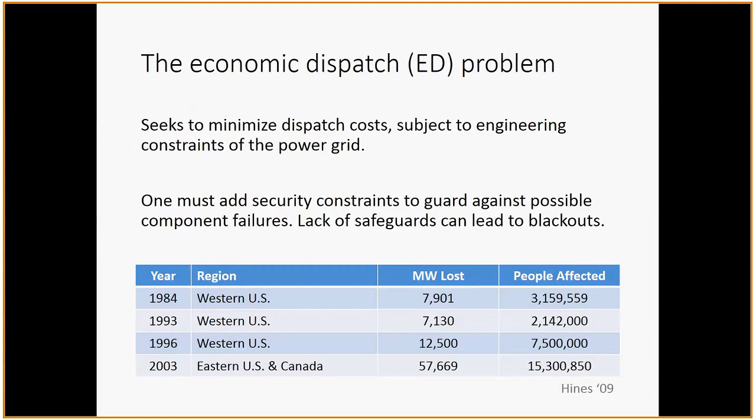So I'm going to split the following talk into two parts. In the first, I'm going to be discussing our proposed risk-sensitive formulation, which I will construct and motivate using existing formulations in the literature. In the second part of my talk, I will demonstrate that this RSCED formulation is difficult to solve at scale, and I will propose a decomposition approach to solving this problem.

So to begin, let's look at the standard economic dispatch problem formulated mathematically. Given some generation at each bus, denoted by G, we have some linear cost assumed to be C transpose G, and we are subject to capacity limits on generation, and the net power injection at each bus must be within some feasible set given by Kirchhoff's laws and line limits.

In this case, we haven't incorporated any contingencies or outages, so to address that, we propose a preventive security constrained economic dispatch, or PSCED. Here it's the same as the economic dispatch formulation with an additional set of constraints to ensure that the net power injection at each bus remains feasible given any single line failure. So this formulation is secure, but it's also conservative.

Line flow limits are thermal, so you can relax them temporarily as long as they don't exceed their thermal capacity. And generators are able to ramp to compensate for changes in the grid topology. So to address this, let's take a moment to consider how to relax line flow limits. Let's suppose we have some contingency that occurs at some point in time.

Immediately following this contingency, we allow the line to exceed its capacity to the drastic action level, which we can maintain for up to 5 minutes before reducing it to the short-term emergency level. That we can maintain for an additional 10 minutes before reducing it to the next level, and in this way we bring the line back to its nominal level without exceeding its thermal capacity.

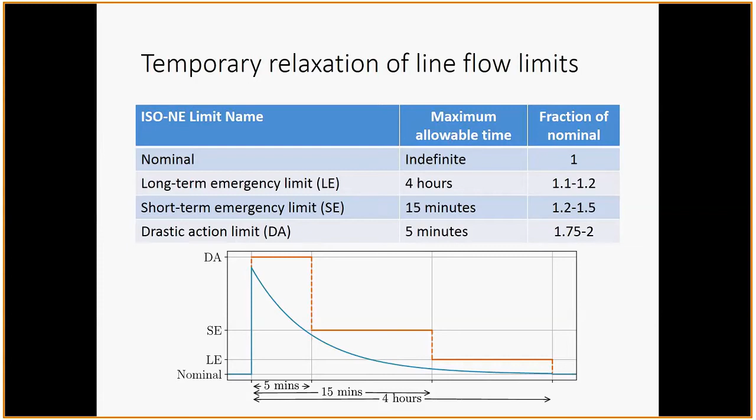So using this and generator ramping, we can then propose a corrective security constrained economic dispatch where we model this recourse action of generator ramping. Here we augmented the constraint for the PSCED case with drastic action line limits, and we now consider a time period in the future where we allow generators to ramp, modeled through delta G. This must be within generation capacity limits and within ramping limits, and the net power injection is within the same set of constraints as the preventive case, but we now adopt the short-term emergency limit.

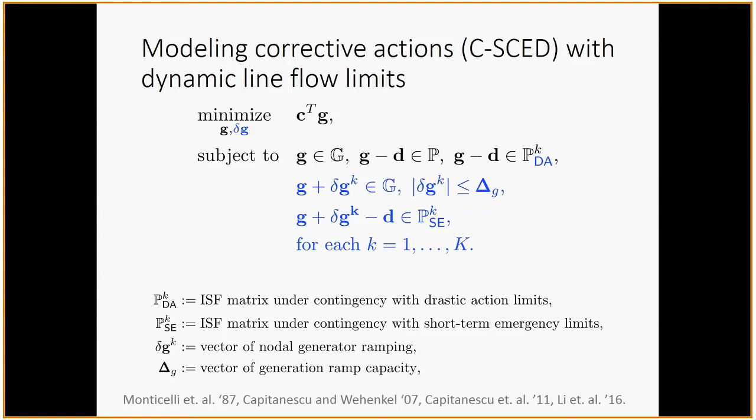So there are a couple of problems with this formulation. In particular, if there is no feasible solution, we can't solve this problem, and this is due to the fact that we are absolutely ensuring that all load is met. So if we allow some load to be shed, we can perhaps ensure that this is feasible, but at the same time, there is this trade-off between cost and reliability of meeting load.

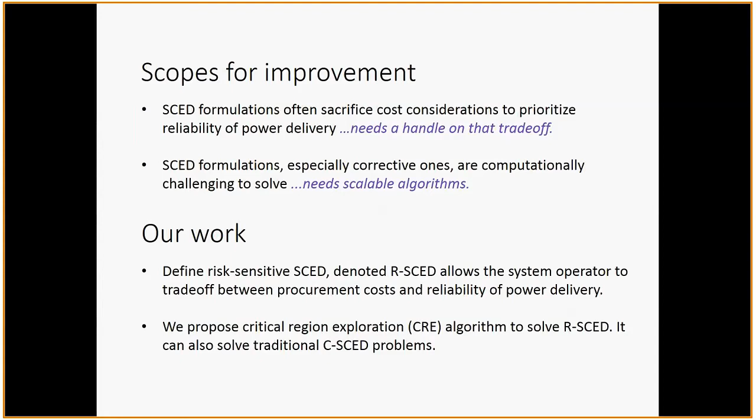So in order to address this, we propose a risk-sensitive security constrained economic dispatch formulation, or RSCED, where we provide a trade-off parameter between cost and reliability. We will then show that this is difficult to solve and provide a critical region exploration algorithm, which uses decomposition to solve this, and can also be used for the CSCED formulation as well.

So to begin, this is our proposed RSCED formulation. Here we allow for potential load shed modeled through delta D, which we ensure is within the short-term emergency limit for the net power injection. Additionally, we no longer take the cost to be just C transpose G. We take it to be the cost of the nominal generation plus a random variable, taking values of the cost associated with each contingency with the probability of that contingency occurring. So this is now a random variable depending on the realized contingency.

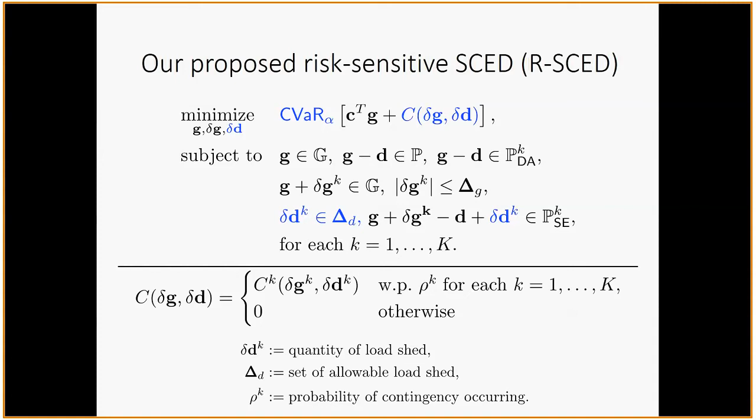So we could minimize this in expectation, like minimize the average cost across all potential contingencies. We could minimize the worst case, like the most expensive contingency. But in this case, we've chosen to minimize the CVaR, or conditional value at risk, which generalizes both of these forms. Before I continue to explain what conditional value at risk is, here is our proposed recourse cost structure, where we have some cost on regulation up and down, and some cost on load shed modeled through the value of lost load.

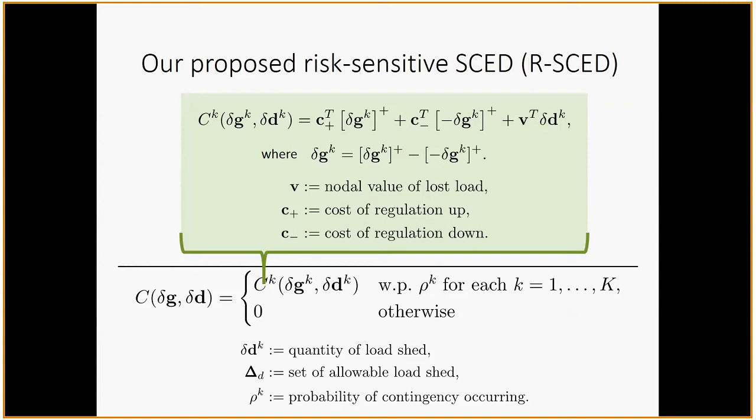From here, let's take a moment to explain conditional value at risk.

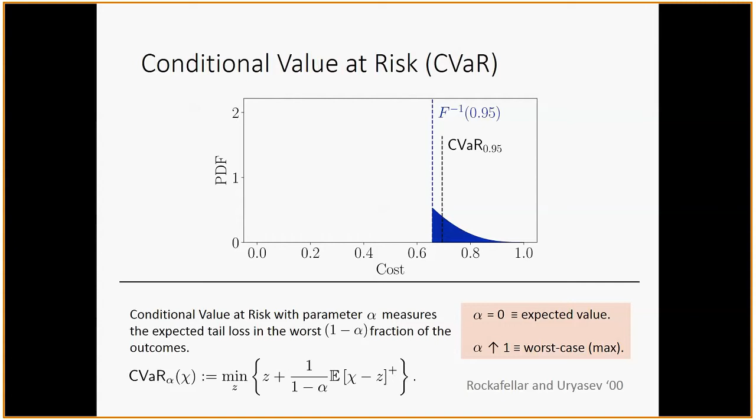So there's kind of two reasons that we chose CVaR. One is the nice mathematical properties. It's convex, and it admits this nice formulation here, given by Rockafellar and Uryasev, which we can use for decomposition. And the second reason is this parameter alpha gives us this trade-off between cost and reliability, which I will demonstrate shortly with this simple 2-bus example.

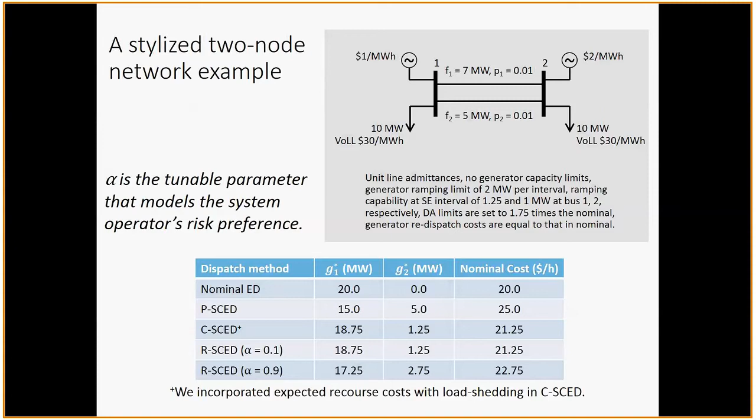Now, this is a nice, simple 2-bus example, but we really care about practical power networks, right? So even assuming a linearized power flow model, you would think it's just throw it at a regular solver, right? However, that's not generally the case. As we can see in the 2383 bus Polish network, while the economic dispatch has a very tractable number of variables and constraints, the C-SCED and R-SCED have an explosion in the number of variables and constraints, and they're not solvable by traditional LP methods in the times required for dispatches in real-time markets as well as day-ahead markets.

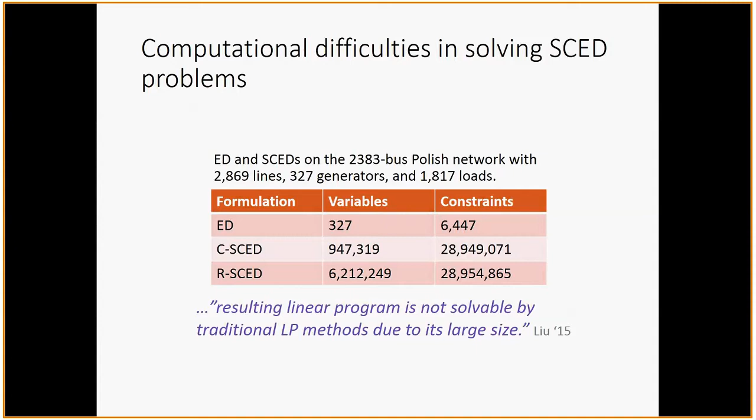So this begs the question, how do we solve this problem? Right? I mean, it's huge. And the obvious solution to us was decomposition. So R-SCED and C-SCED, assuming a linearized power flow model, can be expressed in the following form. We have some cost on x0 plus the sum of some cost on xk for each k. And we have constraints on x0 and an additional set of coupling constraints between x0 and xk for each k.

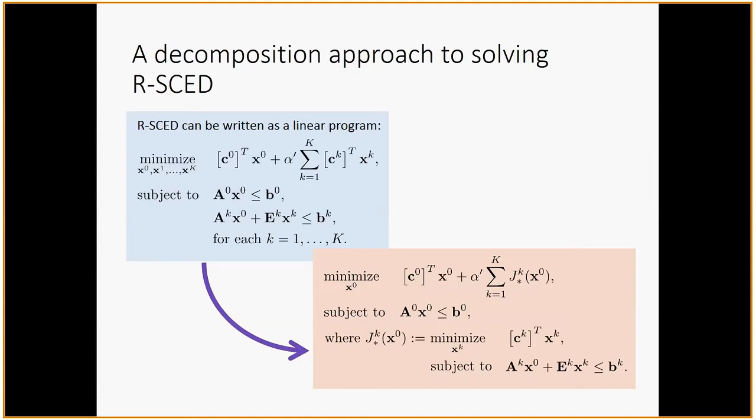Now, this can equivalently be expressed in the following form, where we now decouple x0 from xk. And the cost associated with xk in the original problem, which is referred to as the master problem, is now the solution to this optimization problem, which we will refer to as subproblems. Now, our algorithm takes advantage of some of the properties of this subproblem. In particular, it's piecewise affine, convex in x0, and is a multi-parametric linear program linearly parametrized on x0.

It's a lot of mathematical jargon, and I'm going to try and take a moment to explain what it really means and what we can gather from this. So because it is a multi-parametric linear program linearly parametrized on x0, the solution Jk star describes a polyhedral partition of x0 over which the cost is affine, piecewise affine.

That's a lot of math, but graphically it's actually very simple. So let's suppose x0 lies within some set given here. Because it is a polyhedral partition, we can separate this set x0 into polyhedral sets. That's standard, like quadrilaterals or polyhedrals, stuff like that, right?

So this is a polyhedral set, and the cost over each of these sets, the cost Jk*, is affine, which is nice. So now, by plugging this into our master problem, we now have a linear program, a linear cost on x0 with linear constraints. But it's a much smaller problem than the original problem that we had. The dimensionality of this problem will only be in x0.

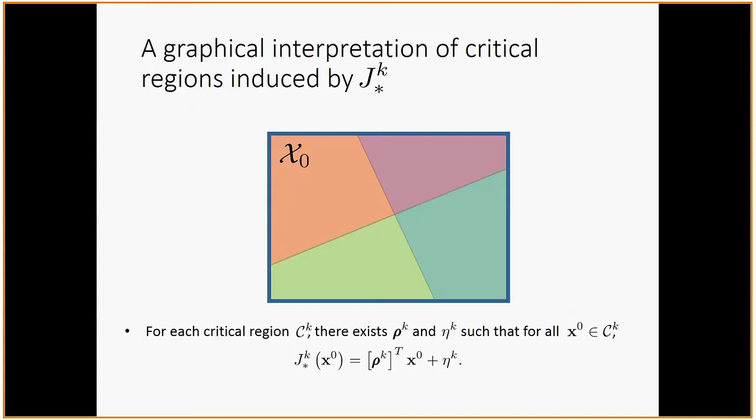Right. So now let's suppose we had a second contingency. This would introduce a new set of critical regions. By taking the intersection of these critical regions or polyhedral sets, we now have a new set of critical regions over which the cost is affine in each region. Right? So then we could solve the master problem over each of these critical regions, and it's a much more tractable problem. We could determine the entire solution space, figure out the answer. However, in the next few slides, I'm going to show we have a systematic approach for solving this problem.

There we go. So let's suppose we start with some x0 given here. We then determine the critical region in which it lies, determine its properties and associated cost, and then solve the master problem shown here over this region, which we can guarantee will go to a vertex. From here, we try and verify if this is the optimal solution, given the information we know about the critical regions we've explored. We aren't able to determine whether or not this is the optimal solution, so we then perturb the solution into an unexplored neighboring critical region, determine its properties, and optimize over that region again.

With this increased information, we now know about two neighboring critical regions. So we can, again, check for optimality. In this case, we are unable to verify it. So we once again perturb it into a neighboring unexplored critical region and do this process all over again. In this case, it goes to a new point. Here, there are no unexplored neighboring critical regions, so we can guarantee that this is the optimal solution. This is not the only case, but it is a very simple case of showing that this is an optimal solution.

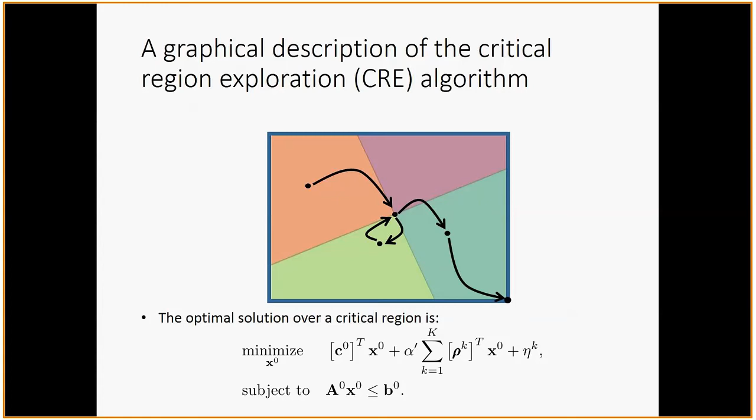Now, I've assumed that we can both check for optimality and perturb into an unexplored neighboring critical region without going back to something we've seen before. But I won't go into the details of how that works. If you want to see, here's the algorithm. It's a lot of math. But the important thing is that this algorithm admits finite time convergence, which means we will never cycle or never get stuck, and we will always get to the optimal solution eventually.

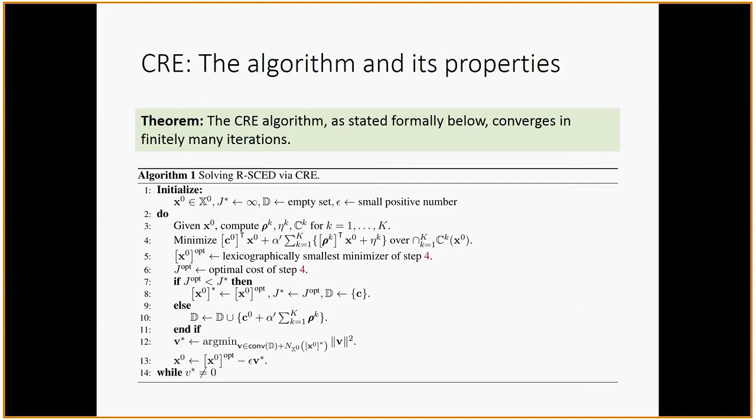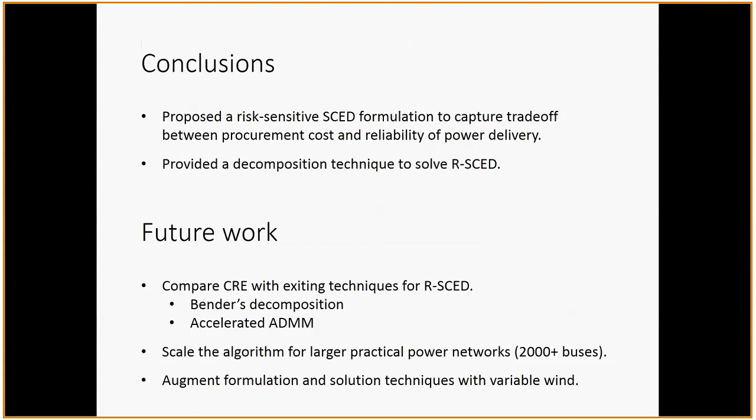In the future, we want to compare this to existing techniques such as Benders decomposition, accelerated ADMM, and other algorithms like that. We also want to implement this for larger systems, practical networks like the Polish network. And we also want to augment it with variability in wind generation. Yeah. Questions?

You still have access to the dual variables, so you could. But dual variables of not minimizing cost, right? But this still makes sense. That's a debate I don't know the answer to. I understand both sides, and I don't have an answer for that. Because I think somebody should be paying the cost. It doesn't make sense to me that your cost is not justified by your dual variable. But it is a deep question. Yeah. All right.

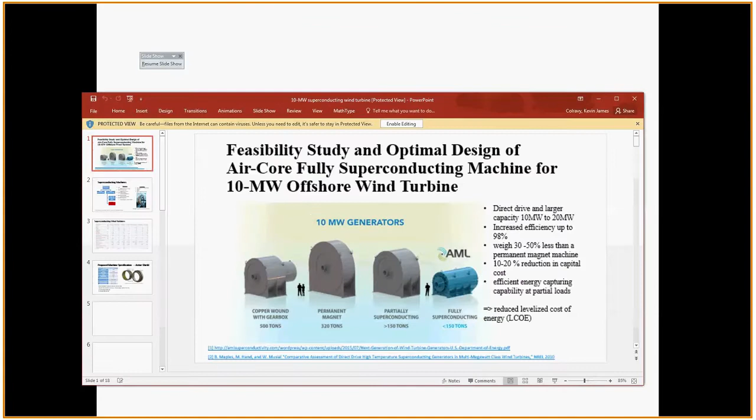Next talk will be by Deepan on feasibility study and optimal design of air core fully superconducting machine for 10 megawatt offshore wind turbine. Thank you. Hi, my name is Thana Deepan, and you can call me Deepan. So this is an NSF-funded project, and I'm working with Dr. Haran and postdoc Dr. Lee.

So this is where we are trying to see the feasibility of a fully superconducting machine for an offshore wind turbine. Why we are looking at this is clearly shown in the picture. When you go from copper wound gearbox machine to permanent magnet and partially superconducting and to a fully superconducting machine, the weight and size reduction is very huge. You can see that.

So, like this. Oh, this one. Okay, so this is the copper wound gearbox, and then from here to permanent magnet, and then partially superconducting and fully superconducting. If you go for a fully superconducting machine, then it will go less than 150 tons. It's a huge weight reduction.

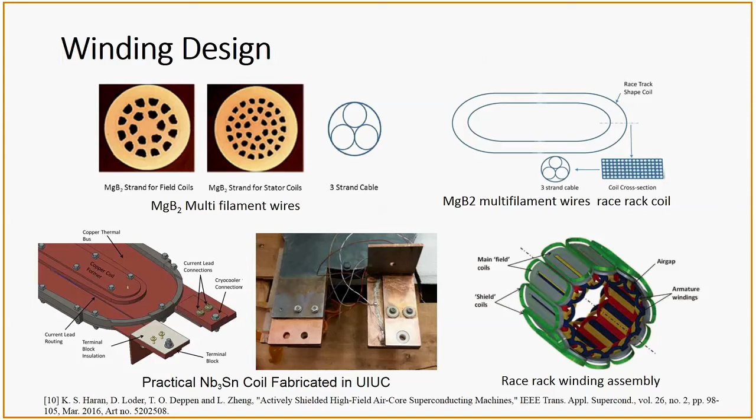So to do that, we need to go through all of these designs. First, we need to look at the winding design. For this one we picked MgB2 windings. This one is cheap in the current market compared with other high temperature superconductors. And this is one of the coils built and tested in UIUC by a previous senior student. This one was actually built for an Nb3Sn coil, but in this project we are trying to explore MgB2 winding. So this is the proposed arrangement of the shield coil and field coils.

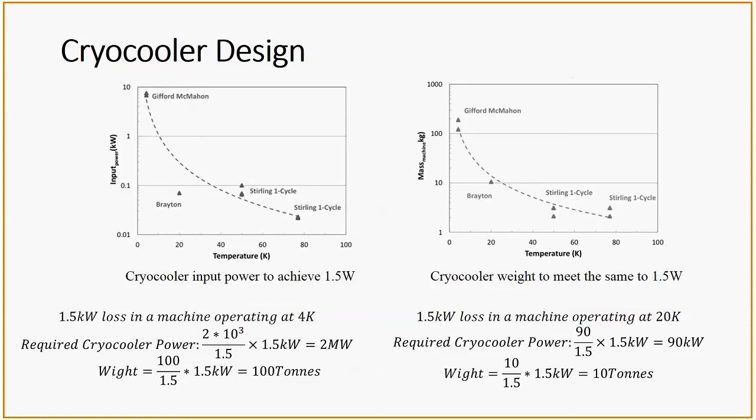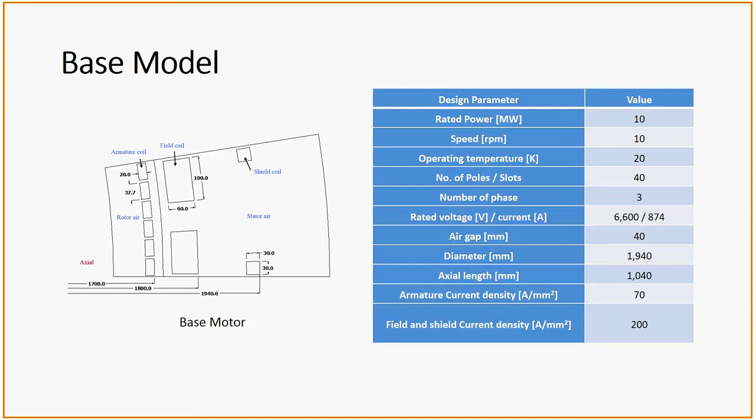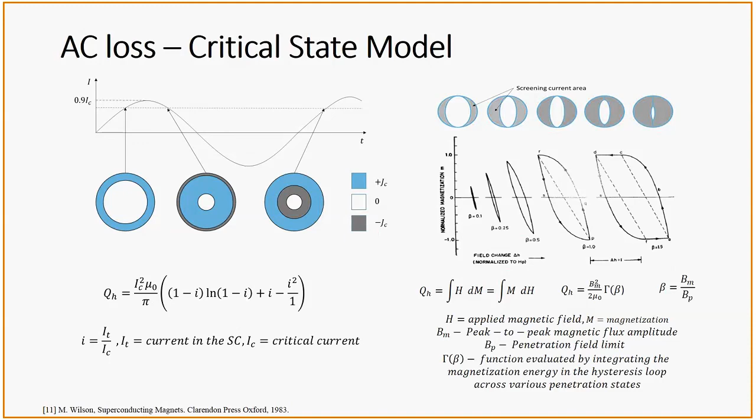Can you go to the slide where you're showing your Pareto set for your optimal solution? Which one? The dot one. Your Pareto set. Oh, that's not the actual result, but I don't know why it is not working. This one? Yeah, that one right there. So the design that you're highlighting right there, design number 39. Why are you highlighting that design? And it's what's causing the spaces in your Pareto set.

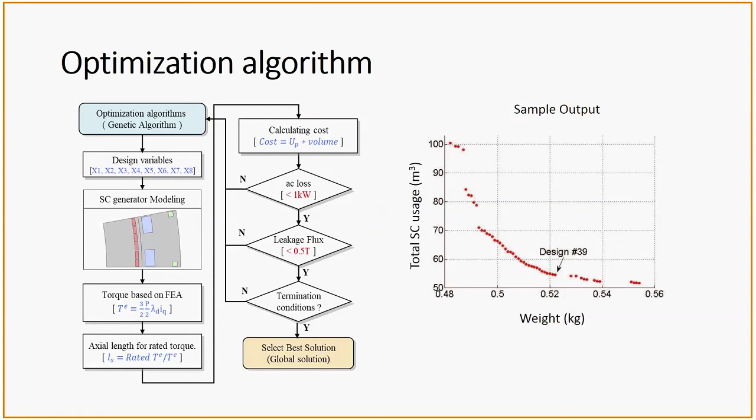Yeah, this one is just an example. I put it here, but it's not the actual design I am targeting. I showed it here as an example of how the output will look when we plot this. It's not the actual design we are looking at. We haven't finished this optimization. Okay. But the idea is we have this A1 and A2, so we can pick any design we want.

For example, if somebody wanted a design with less superconductor usage to reduce the cost, then we will go for a design that maximally reduces the superconductor usage, but we will increase the shield iron. So we can choose the design according to the application. So there's a trade-off between the weight and the superconducting. Yeah. So really the utopia point is I want to have super low superconducting and as small a weight as possible. But that's impossible to do, right?

Yeah. Superconductors will increase the cost, while the shield iron will reduce the cost. So we are trying to see, for example, if I fix A1 and A2 to 1 and 1, then we can see a kind of balanced design where we can balance the cost and weight.

So is your actual Pareto set 3-dimensional rather than 2-dimensional, as you're showing? Because you have a cost term in there as well? I mean, 2 dimensions. We only have the cost and weight. So that's what we are trading. Yeah, cost and the weight. Okay. So in the cost, the term that we talk about is superconductor volume, and then we just consider the weight.

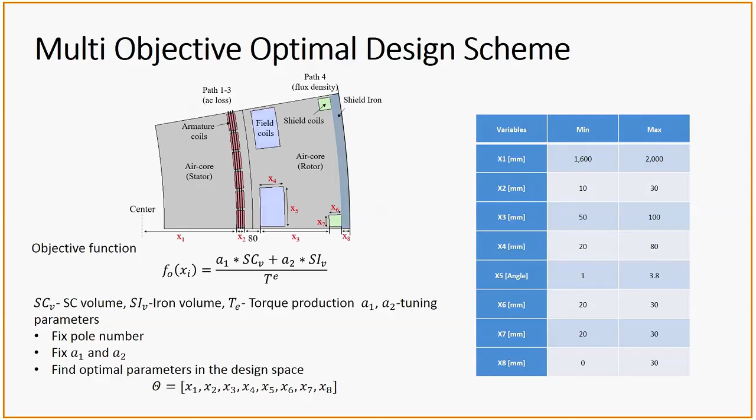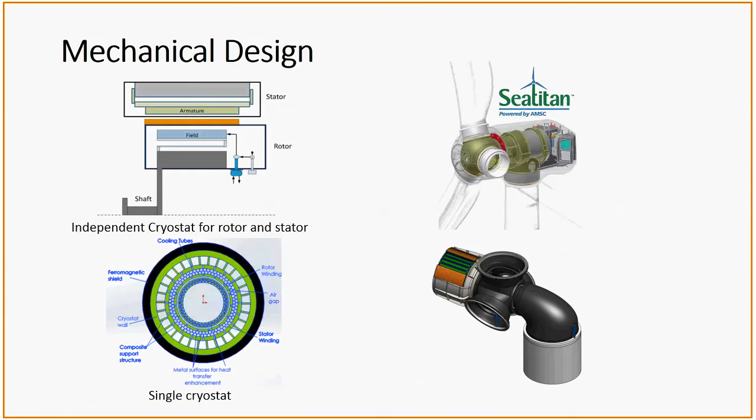Just a quick question, I don't know if you commented on it, but if you haven't, can you comment on your reasoning for fixing the pole count? We are not fixing the pole count here. So for example, in the base model, we only picked one. Oh, sorry, I've gone all the way up.

So for example, we are considering all these poles. So we will get an optimal design for each number of poles. We are not fixing the poles. But for the base model, we considered 40 to see how it looks. But in the optimal design, we are going to get an optimal design for each number of poles, and then we will see which one is best for this application.

So the end goal is to apply this to offshore wind? Yeah, offshore wind. And then you're saying that you want to look at the levelized cost of energy. Did you think about trying to minimize that as your optimization problem? No, not at this point. At this moment, we were trying to figure out most of the design problems, like how to mitigate the AC loss and how to design the cryocooler. And the plan is to come up with the complete design.

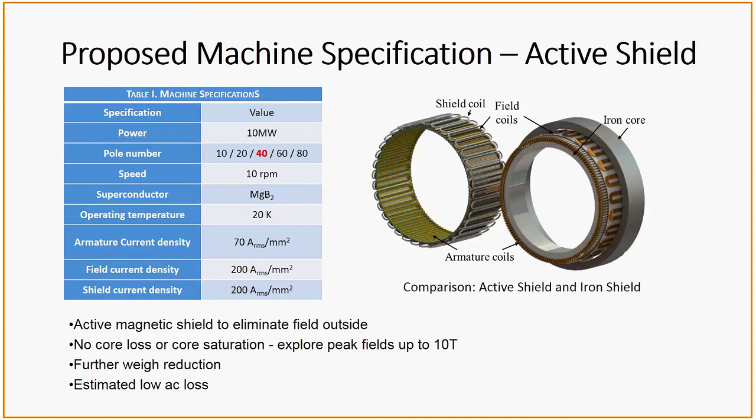When I look at the literature, what I identified is that all of these designs did not solve all the problems. Somebody calculates the AC loss, but they don't estimate how much superconductor they used, so there's no complete design so far. So we will try to see whether we can address all the problems, and none of these designs have the actual mechanical design of how the torque can be transferred. For example, we have the cryocoolers, and we need to connect the cold parts to the warm parts, so there are problems. So we will try to see whether we can solve them.

Yeah, that one, the shield coil design, is proposed by Dr. Haran, and some initial studies were done, but that's also not fully done. They have done research on whether they can apply this machine for an aircraft application, but none of them looked at a wind turbine. So we are focusing on wind turbine.